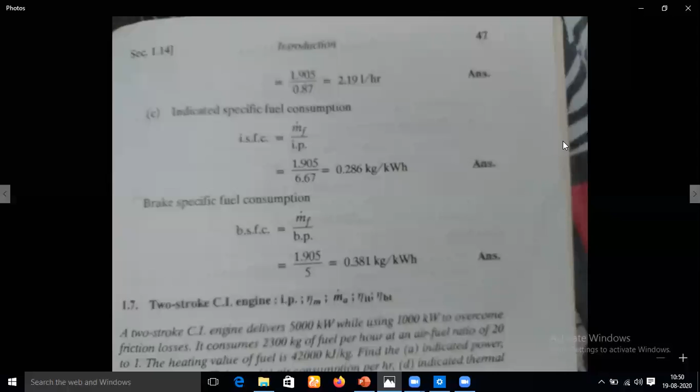Brake thermal efficiency is 18.63%. Very good. This is the answer. Okay.

What I have done, I have converted this 2300 kg per hour in kg per second. Okay. This is kg per hour. This I have converted it in kg per second. How? In the denominator, what I will do, I will multiply it by 3600.

So 2300 upon 3600 will be the kg per second. So this 3600 goes up here. Okay. And it comes in the numerator. Okay. Hope you are getting this, students. Very easy thing. Khan Ahmed has got the answer. Indicated thermal efficiency is 22.36.

Very good. So what you have to do, you have to convert this kg per hour in kg per second. So how you have to do is, it is 2300 kg per hour. Very simple. See, you have to understand the logic.

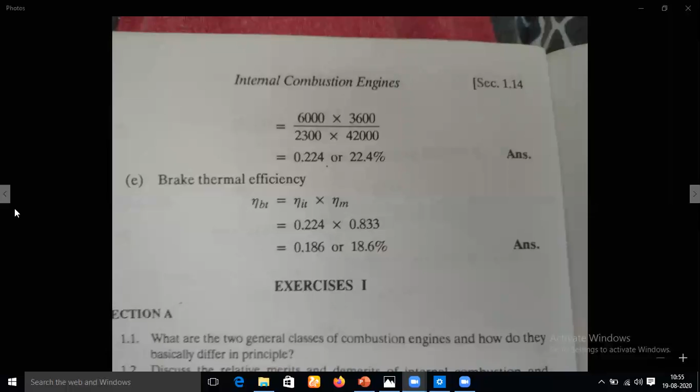Yes, this is the question. This is the question now. A 4-stroke petrol engine delivers 35 kilowatt with a mechanical efficiency of 80%. The fuel consumption of the engine is 0.4 kg per kilowatt hour and the air fuel ratio is 14:1. The heating value of the fuel is, that is calorific value.

Find the indicated power, friction power, brake thermal efficiency, fuel consumption per hour and the air consumption per hour. So what is given here, students? A 4-stroke petrol engine is there. It delivers 35 kilowatt. So this 35 kilowatt is your brake power, with a mechanical efficiency of 80%.

The fuel consumption of the engine is given in kg per kilowatt hour. This is not your m dot f. This is your brake specific fuel consumption. Try to see the unit. It is kg per kilowatt hour. And the air fuel ratio is given 14:1. Heating value of the fuel means lower calorific value. Calorific value is given.

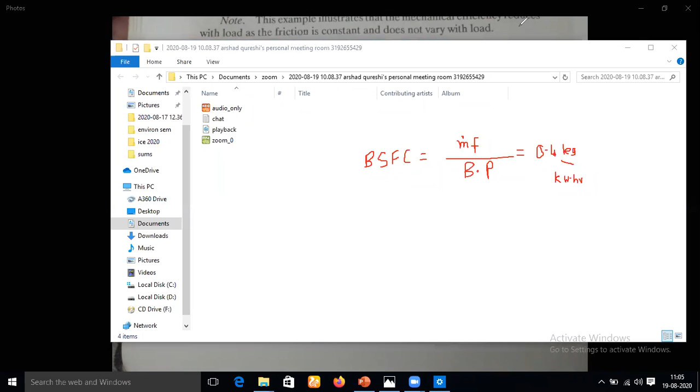Yes, students, answers have been given by Aman Attar. Indicated power is 43.75 kilowatt. Friction power is 8.75 kilowatt. And brake thermal efficiency is 20.9. Very good. Your indicated thermal efficiency is 26. Air consumption per hour is 196, and fuel consumption per hour is 14 kg per hour. Very good.

Air consumption, Uwais also got the answer. Air consumption is 196 kg per hour. So all of you have solved it, students. See, mechanical efficiency is equal to brake power upon indicated power. From here you are getting the indicated power, so indicated power is equal to brake power upon mechanical efficiency. Friction power also you are getting. So forget about this formula. We will not use this formula.

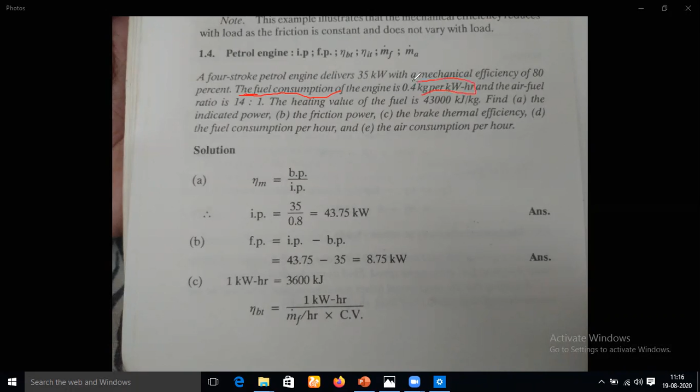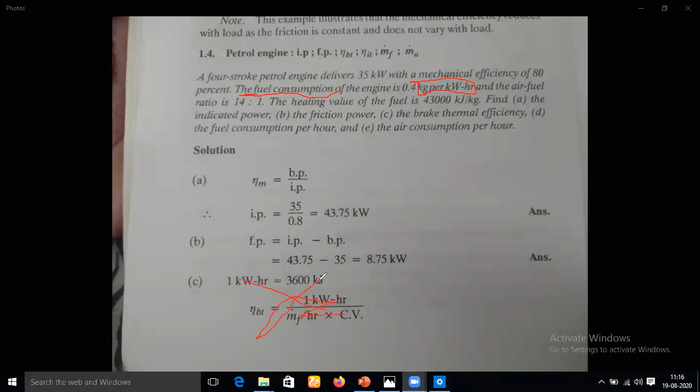All of you have understood this, students? Can we move ahead? Any doubt till here? Any doubt? Okay, let us move ahead now. We'll move to a different sum.

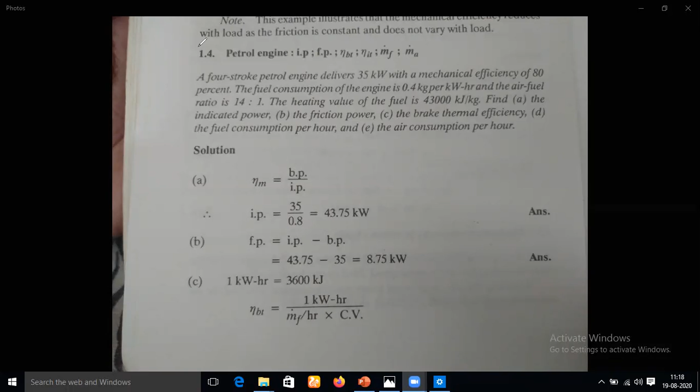Yes, okay, I will give you a different sum now, which will be based on different values of fuel consumption, different units. Let us see whether you can solve it. Let us move ahead. So let us solve this sum, okay.